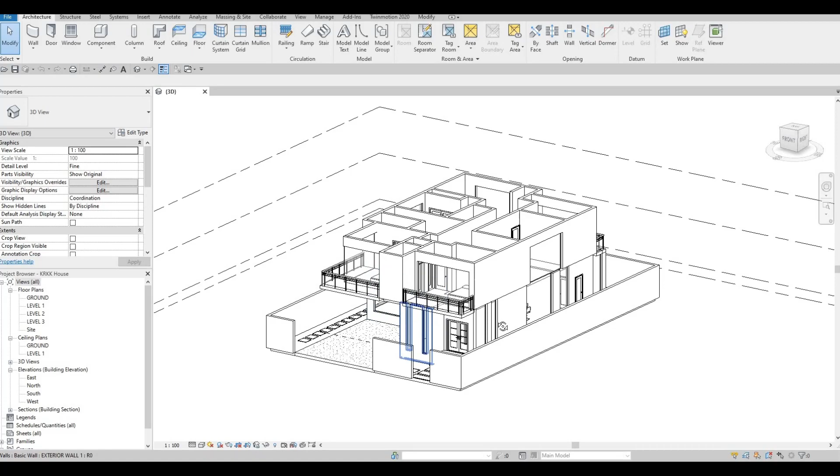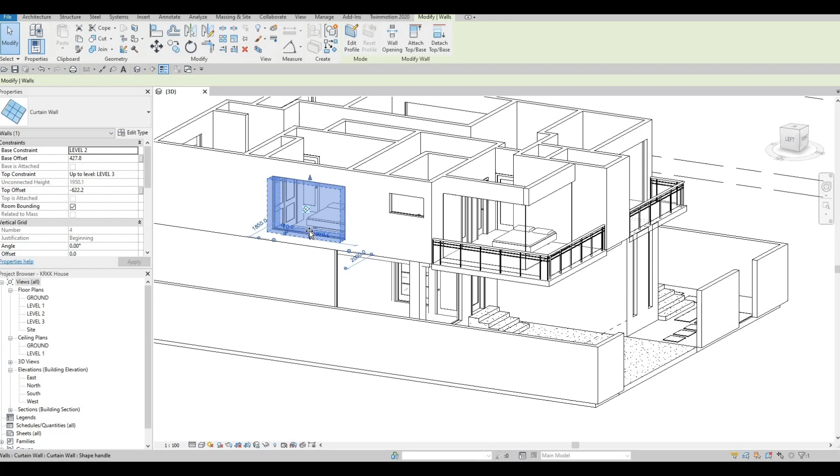So in the previous video, we were able to add in all the windows right here, and now we're gonna continue working on this. What I'm gonna do is set the sill height for the window. For this one I'll set it like that, but here I want it all the way down. For this one, it's the washroom, so I'm gonna set it above right here. And then this one, I wanted to pull it up a little bit because we don't have anything right here, only the bed is showing. I'm also gonna fix everything at the bottom.

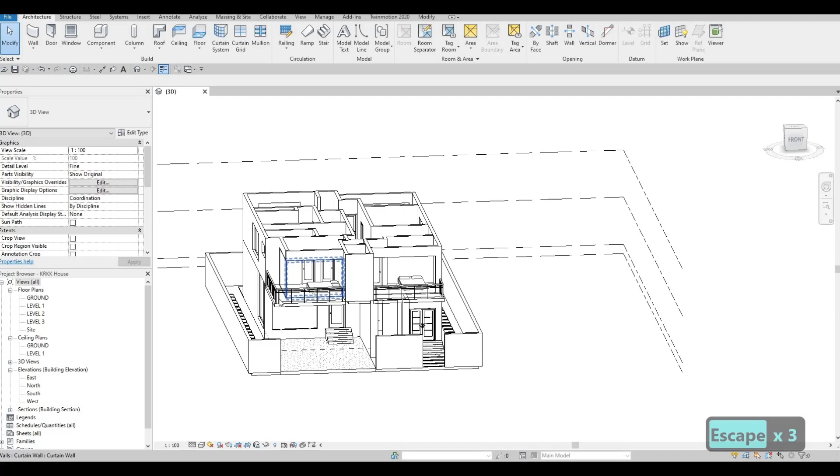So we're probably gonna concentrate here. I'm gonna align right here, and then let's go around here. This is the same height like that. This is where we have our balcony, so I want it all the way down, same as this one. So we're good with this. This one is already set up going all the way up, so we just need to make this one beautiful.

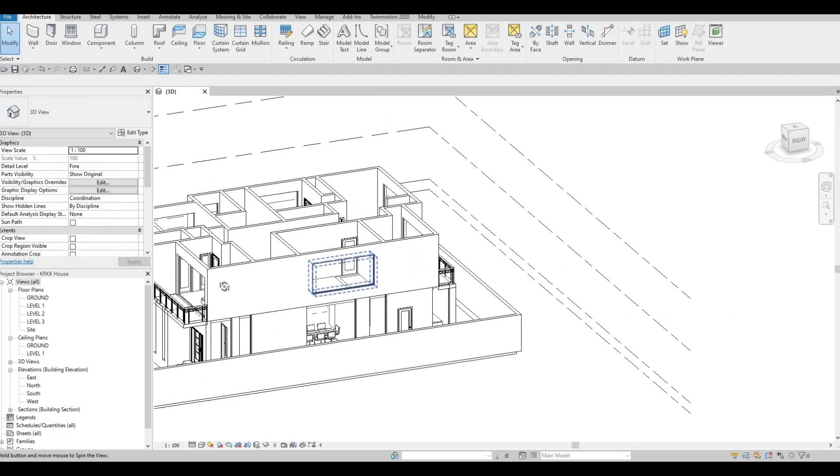I'm going around to double check the ones at the top. Once you're good, let's look at the bottom. So for the bottom, as you can see, we haven't set up the height. Usually the height for the top is all uniform.

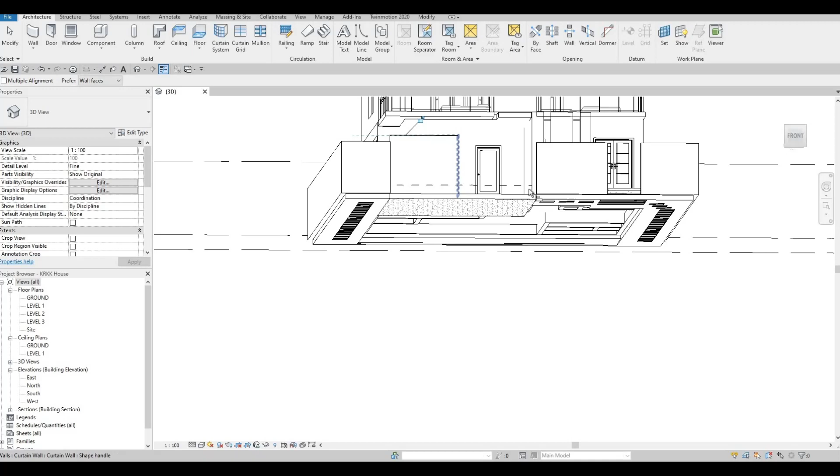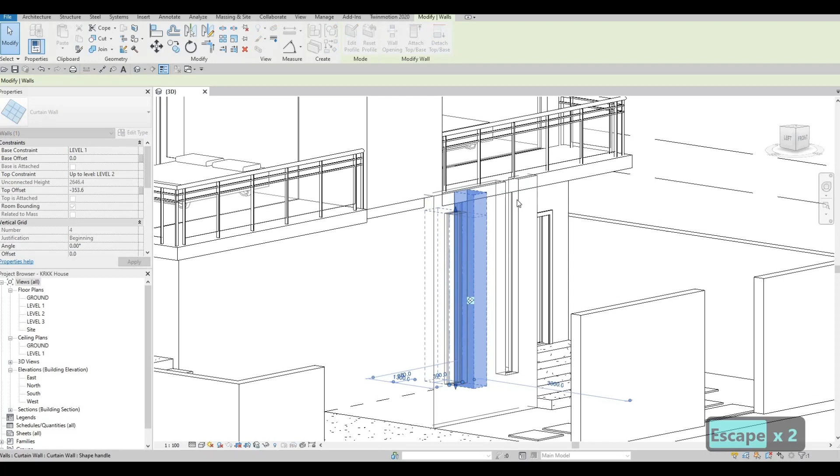So here I'm gonna do this one all the way, so like that, and then here we're going to fix this one as well. What I'm gonna do is pull this one down first because I'm having a hard time getting it. So now I'm just gonna set it to the correct height. There we go.

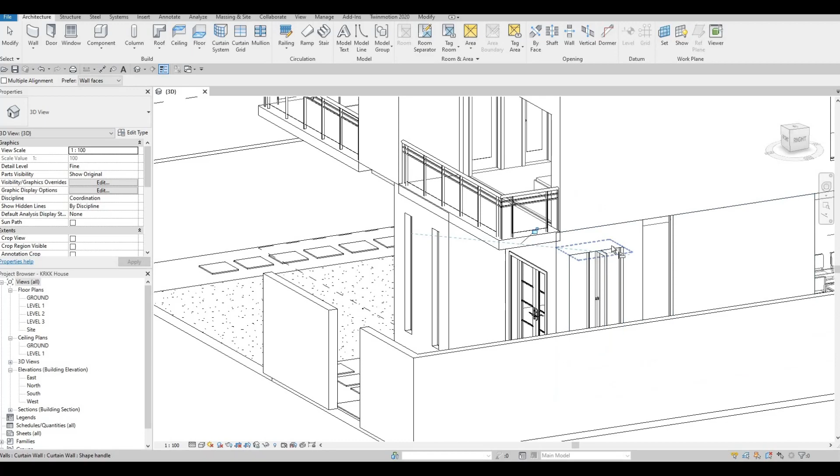This is a washroom right here, so we're going to pull it up later on. This is for the maids and the driver, and then we're going to pull those up as well.

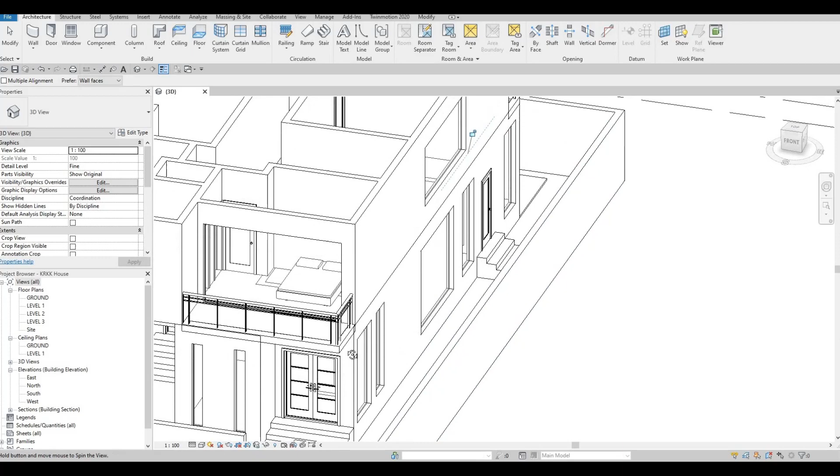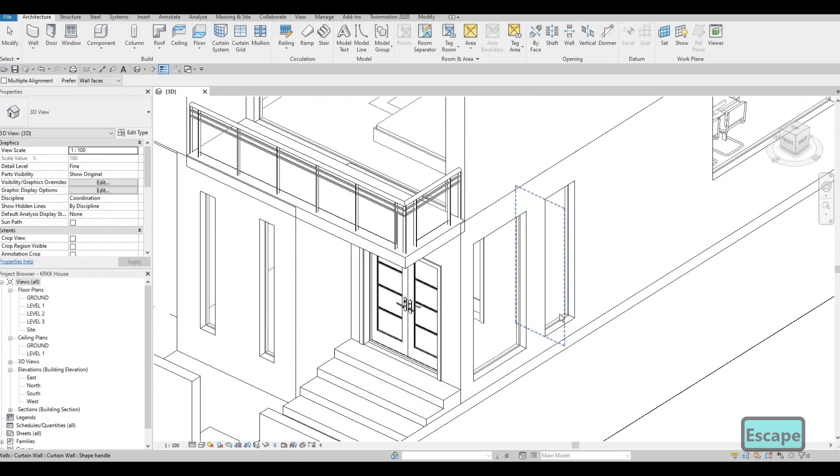So I'm gonna set this one, this height, so just about like that is good enough, and then it will be the same as the rooms for the maids and the driver. And then for this one, this is the one for the washroom, so I'm gonna pull it up a little bit like that, and then here I'm gonna set it up like that, and then we're probably going to just use this height to make everything consistent.

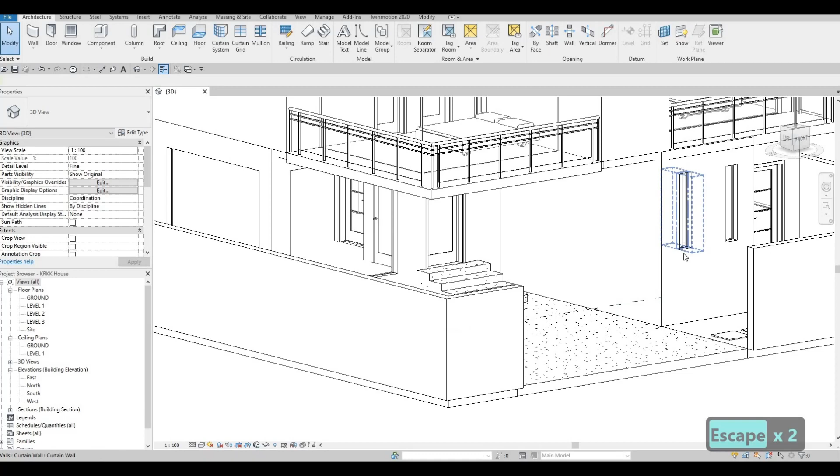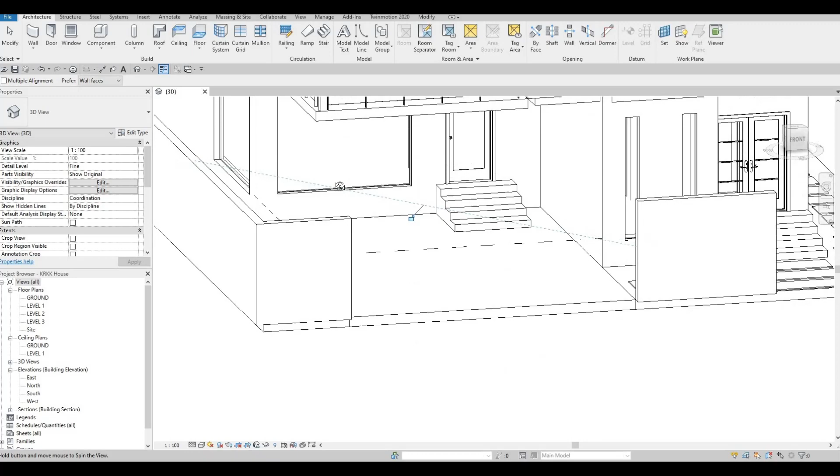But here, no, I want to set up the proper height here, not all the way down, but at least you can see the way it looks. Just want to make sure that it's not actually all the way down, so I'm gonna pull it a little bit up.

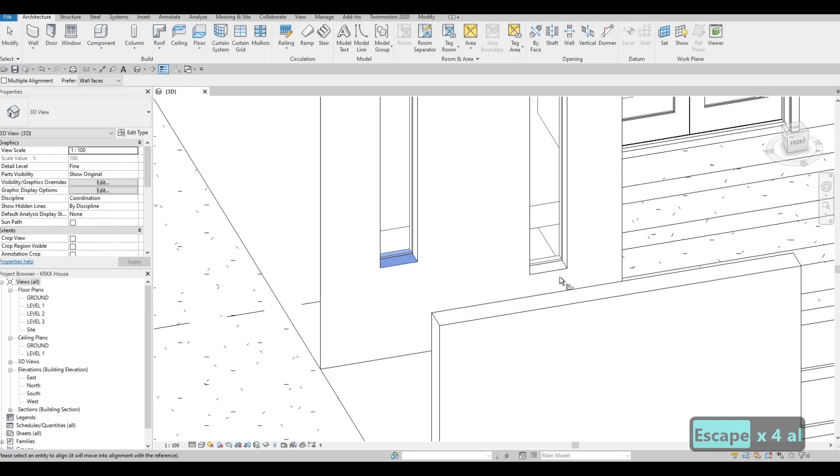And then here I'm gonna pull it up manually because I just want to showcase right here only. And this will be the carport.

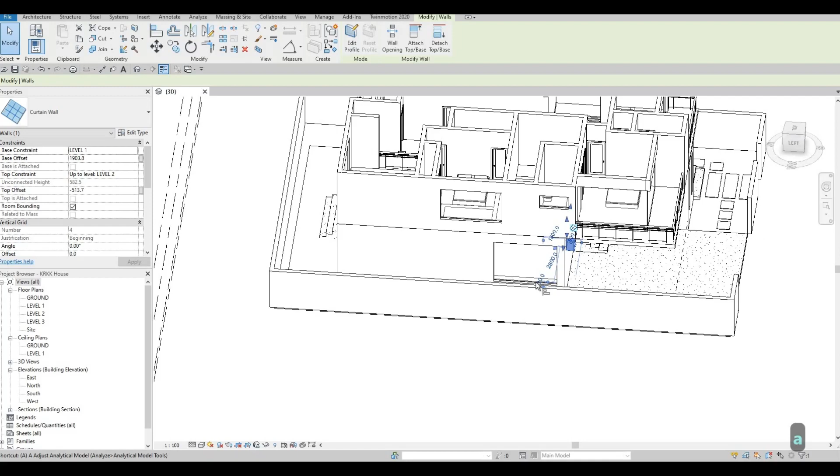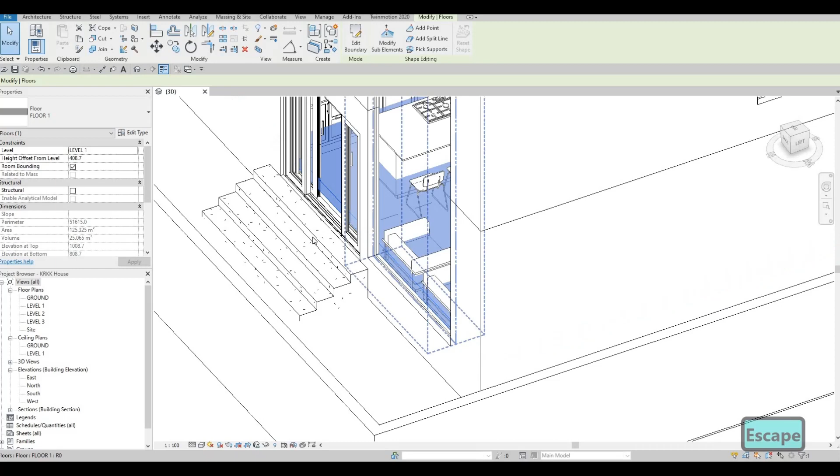And then for the height here, let's set up the same height right here. And then here we need to show it right there. Height offset, there shouldn't be a height offset, so let's put it in 0. That's why I'm noticing there's some irregularities with that one.

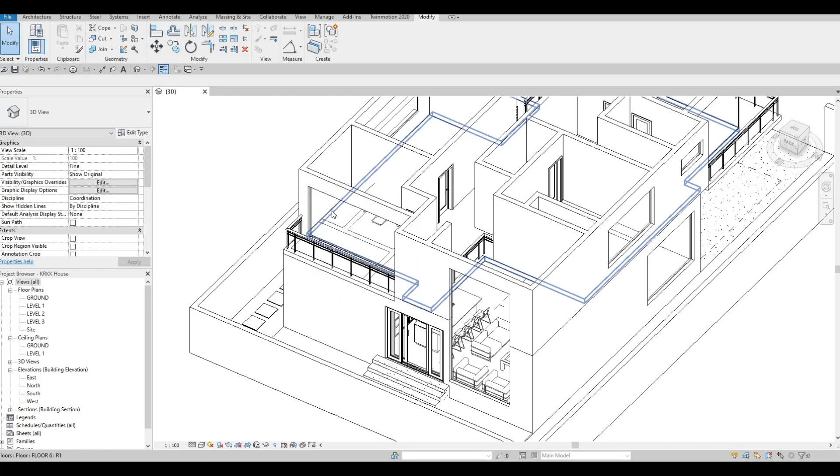Okay, now I'm gonna check the height offset. It should be 0. Okay, that's fine. Also, what I'm going to edit is this. I want it to be close to here. I want everything to be proper.

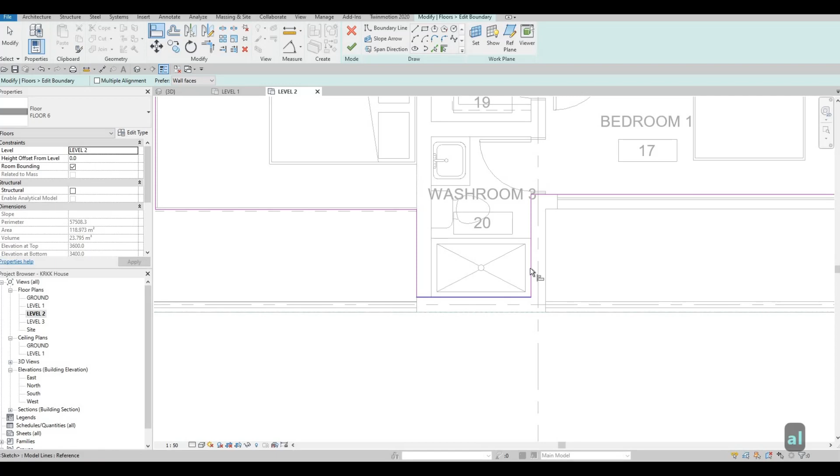Let's go to level 2 so that we could see it. You need to go outside here. You need to go outside here. I think this one is good. And then if we check again, everything is proper.

So now let's add the roof. So we need to go to level 2. The reason we're gonna go to level 2 is because I want to show or to see where we're going to place the roof.

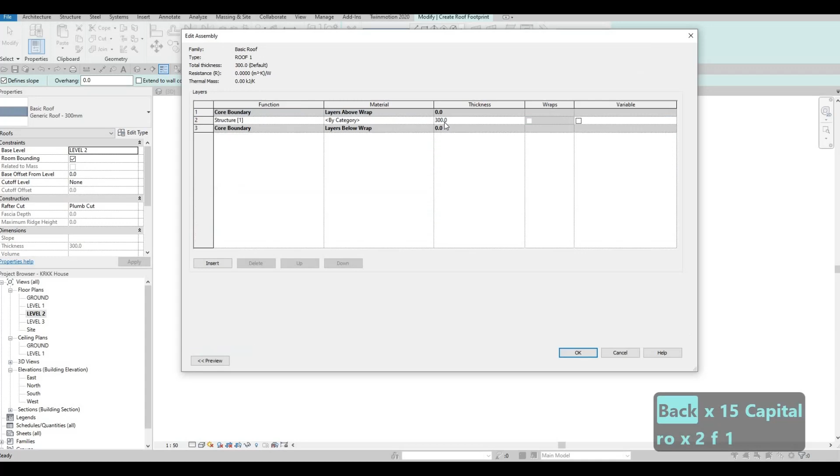But once we select the roof, we're going to change it to the proper level. So you need to go to architecture, click on roof. You can use this, edit type, duplicate, roof number 1. Press OK, edit, 200. And then here, let's put in the proper material, shingles. Use this, press OK, and then OK.

Once you're good, I want you to click on rectangle. Make sure this one is checked, because this is not a flat roof. And then this one should be 2000, so 2 meters offset or 2000 millimeter offset.

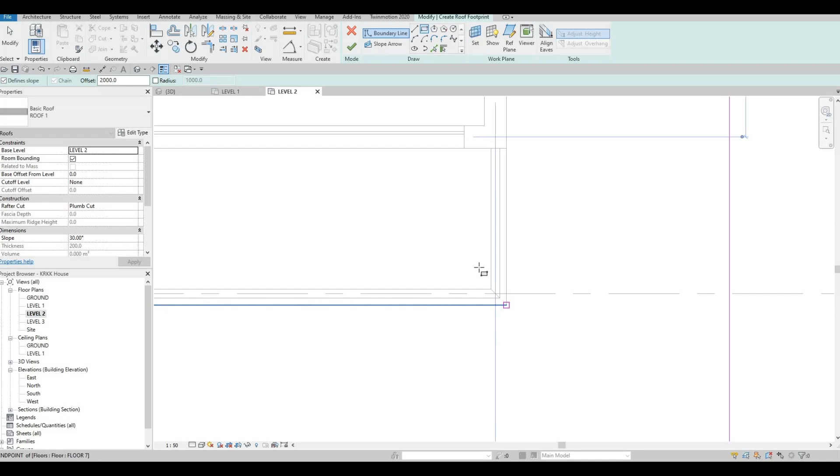I want you to click on each end, so the corner right here and the corner right here. And then because we've added offset, it will offset 2000 exactly, and it will be on the outside, not the inside offset. If your offset shows from the inside, you just need to click on spacebar to flip it around. And then now, click on finish.

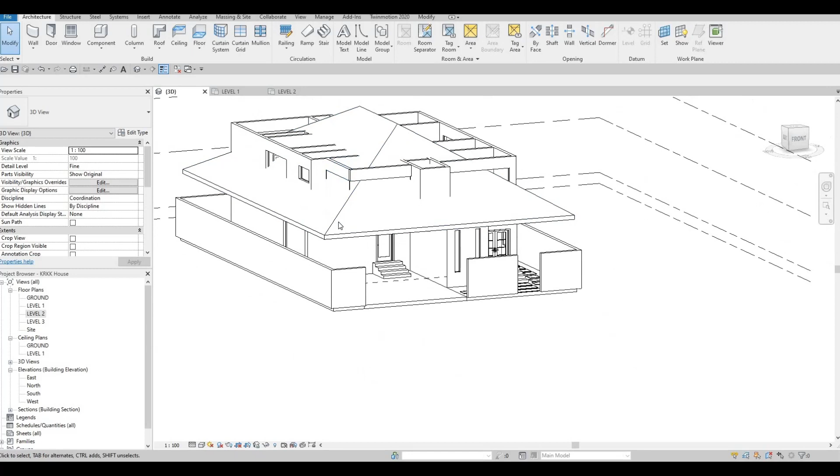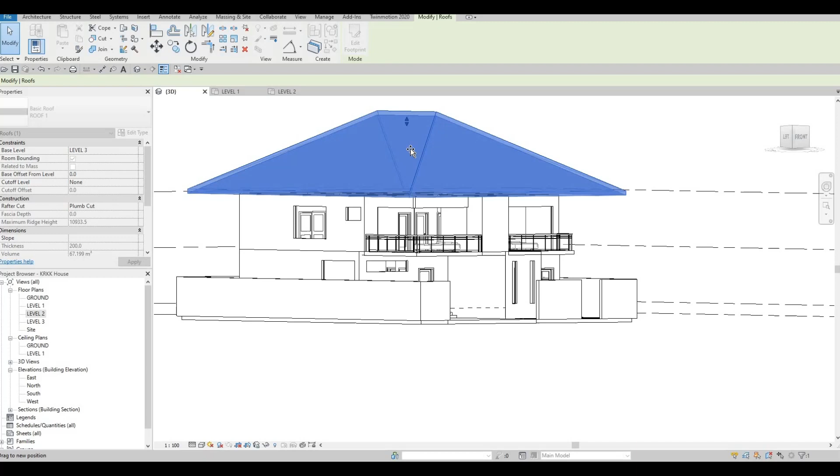I want to go to here, and then now we could select here, base level. Let's change that to level 3 and it will go up. So that's how easy it is to change the level of that. And then after that, let's go click here. We can manually drop it to the desired height that we want.

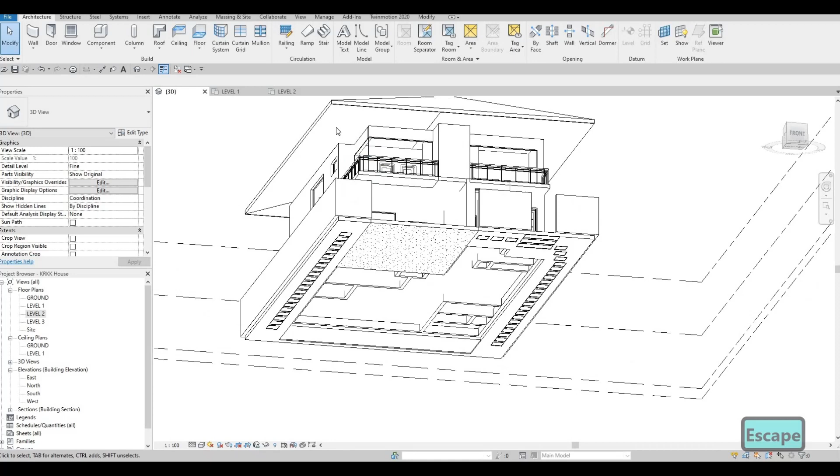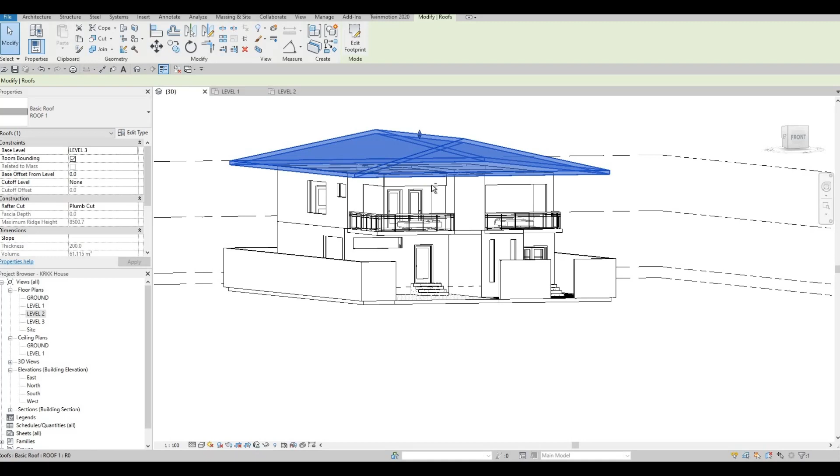This is a design portion, so we could just manually change it to the design that we want to. Most of the time it depends on the location, if there's snow, it needs to be on a proper ratio, height to slant ratio, those kind of stuff. So depending on where you live, there's a proper ratio to use for the roof. For now, we're just doing this as a design, so let's just leave it like that.

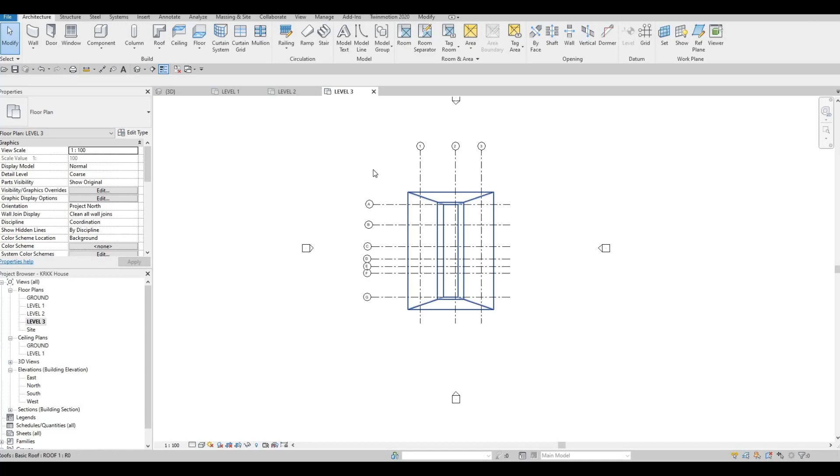After that, what we could do is now go back to level 2, or we could go to level 3 if we want to, but the layout of what we're doing is not showing here, so this is fine. So here there's a drop down under roof, and we're gonna create a soffit. Click that, edit, duplicate.

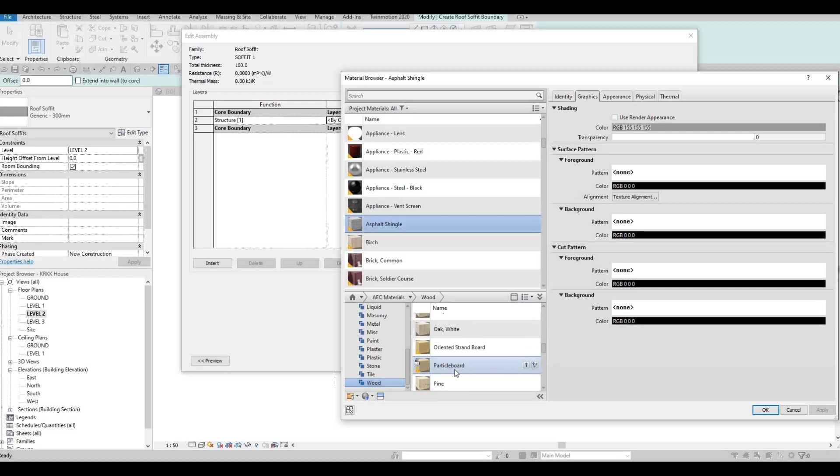You could put this one as soffit 1, and then press OK. Edit. You can change the thickness to the desired 200. I want to maintain this the same, or we can do 100 - it doesn't matter. What I want here is a wood finish. I want my soffit to have a wood finish, so I'm gonna choose something right here, and then press apply and then OK, and then OK.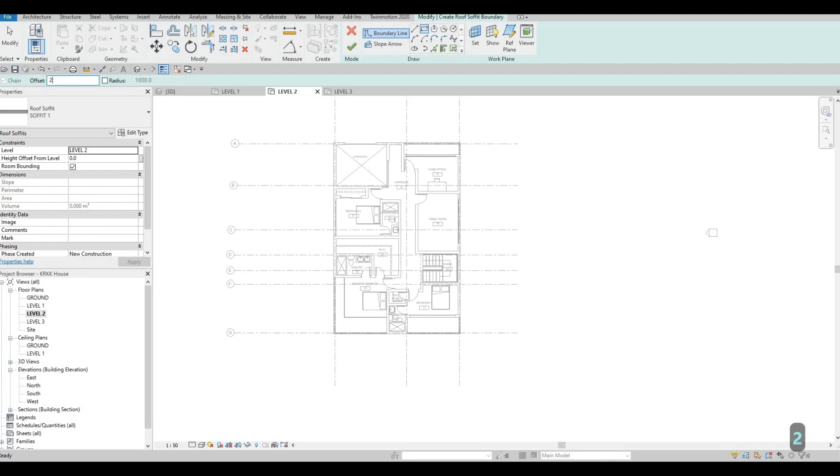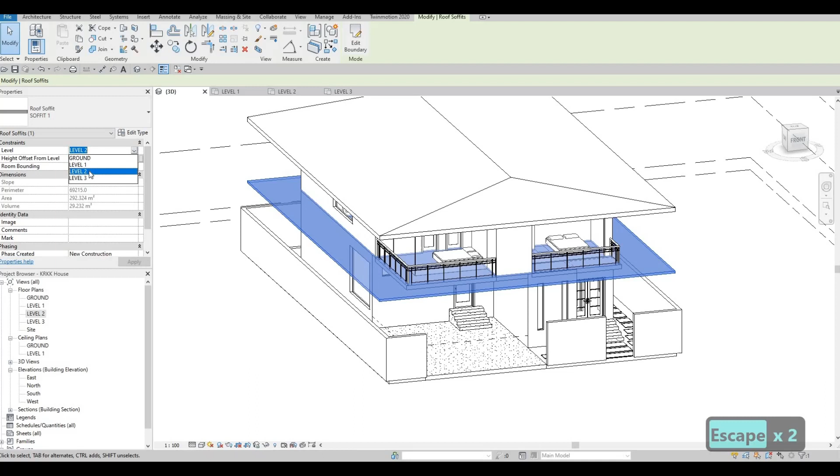After that, rectangle again, and then here we need to go offset. Click the same thing as the roof, and then click on finish, and let's see how it looks. We need, once we go here, to flip it to the right level, or right base, which is level 2. Click apply, and it will look like that.

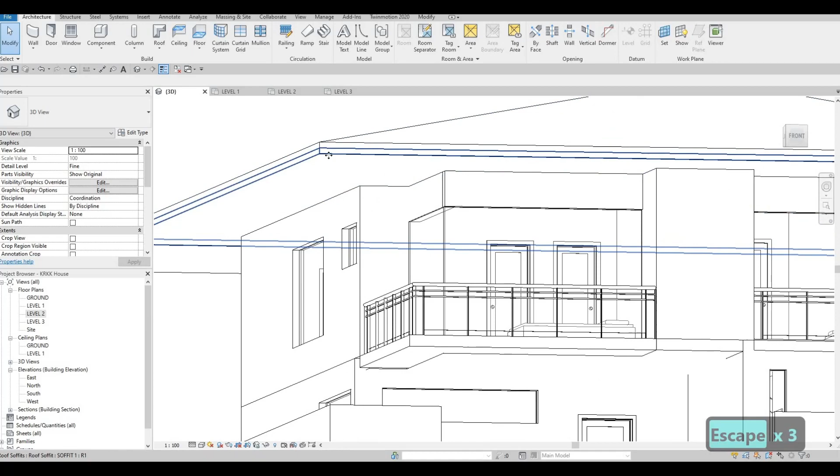Now what you just need to do is, we just need to add in some design for our gutter, or we're going to use a sweep command for our model in place. Either way, the only thing is for the gutter, you will need to create a profile, and that takes a while. So for me, I just like doing model in place in terms of gutter instead. Here I created the soffit, so we could basically add a model in place around this.

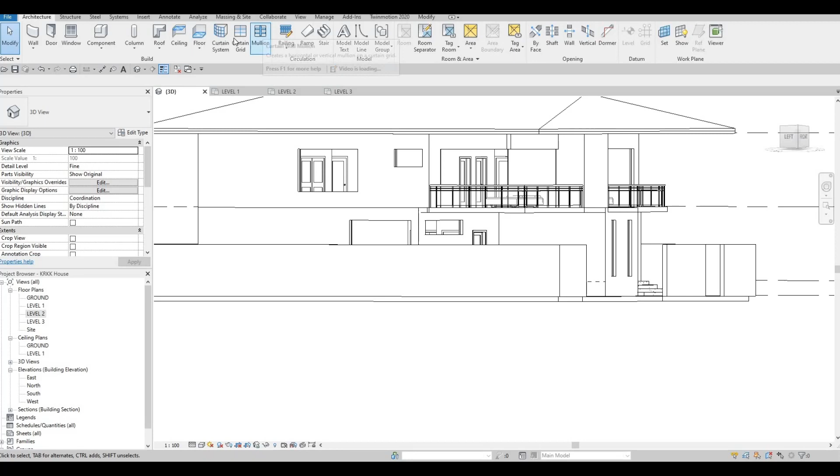But before we do that, let's finish up our windows first. I just like to add the roof so that everything looks proper now. But now I want to add curtain grids to our windows. So here what I'm gonna do is, I'm going to have at least a 500 at the top. I'm gonna do that here as well, and I'm going to divide it afterwards.

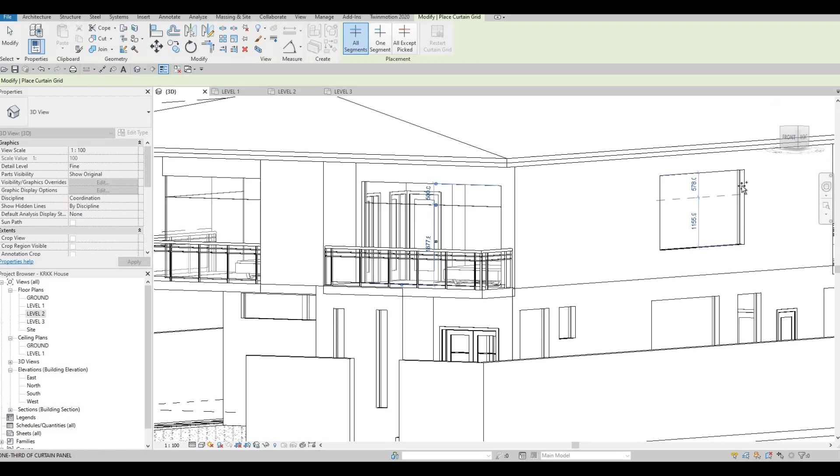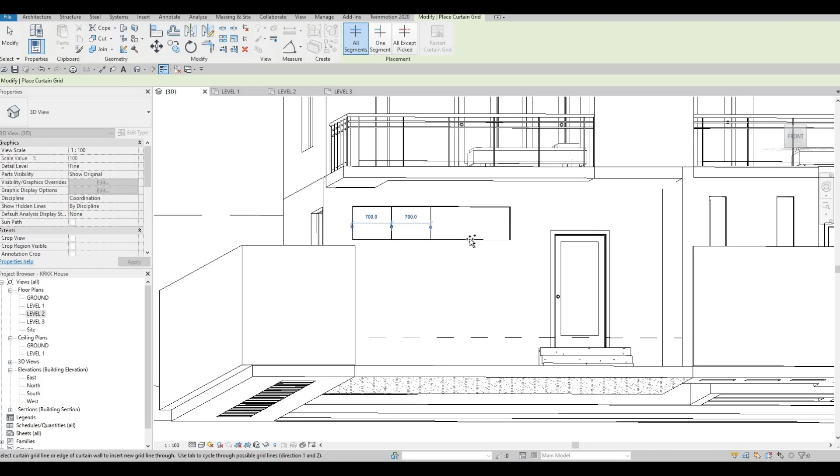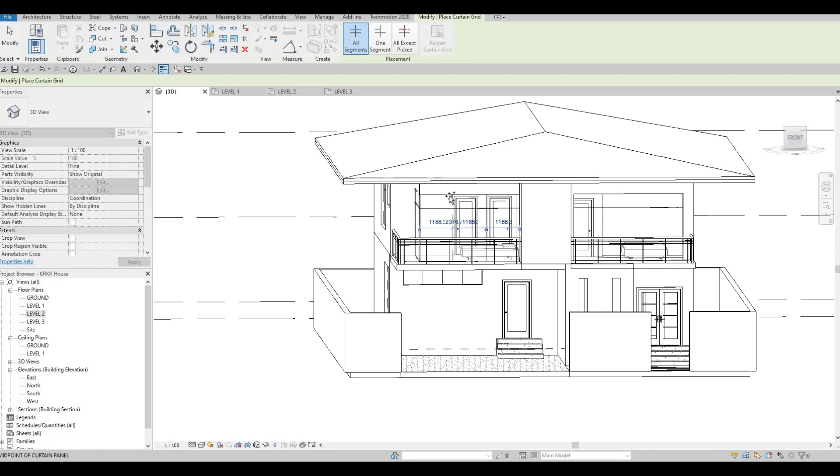So 500 at the top, we can add it here. Most of the time I'm gonna do this on those balcony windows, and then here I'm just gonna leave it like that, but here I'm going to divide it like this. Okay, and now let's divide this by 3 here. And to the point that we're going to divide the same thing.

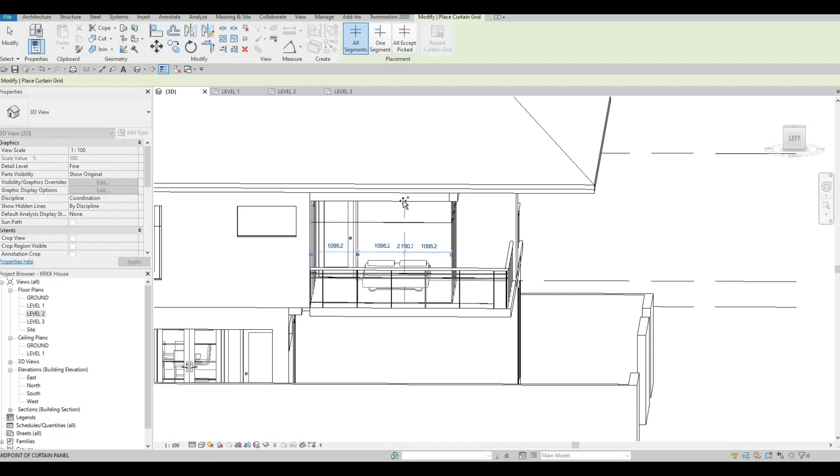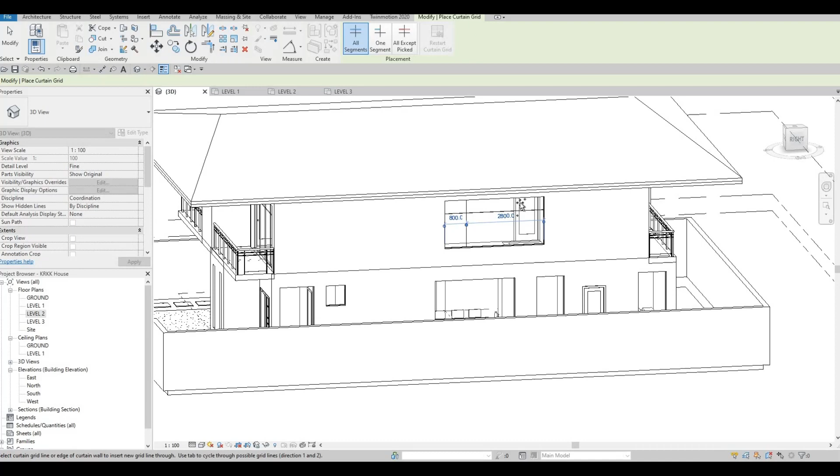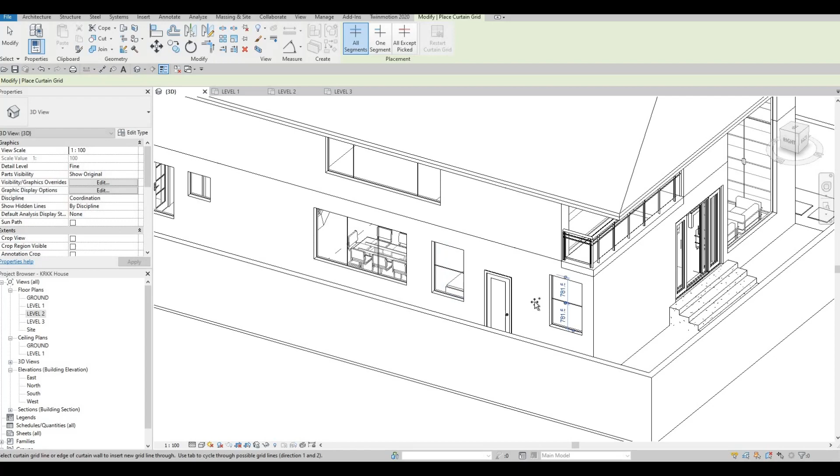So 3 as well to make it proper. I'm going to put probably 800 on each end. There we go, this one is just straight up 3. And then this one probably in the middle. This one middle as well, and then this one middle.

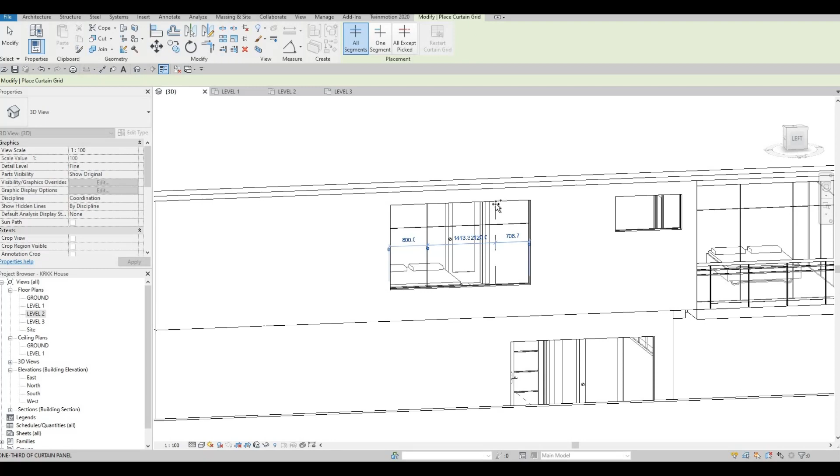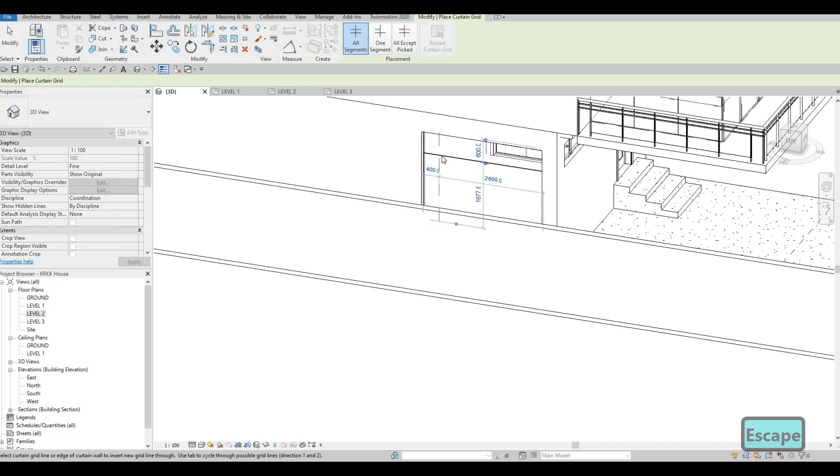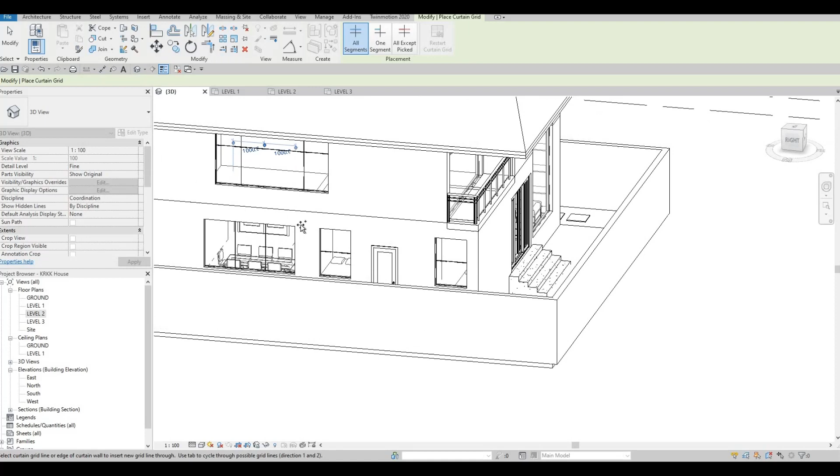So I'm just making it simple for others. This one 800. Curtain grid here, middle, and then here 600 as well from the top. And then 3. And then let's just add this. I'm just double checking all. So this one is the only one, and then this big one as well.

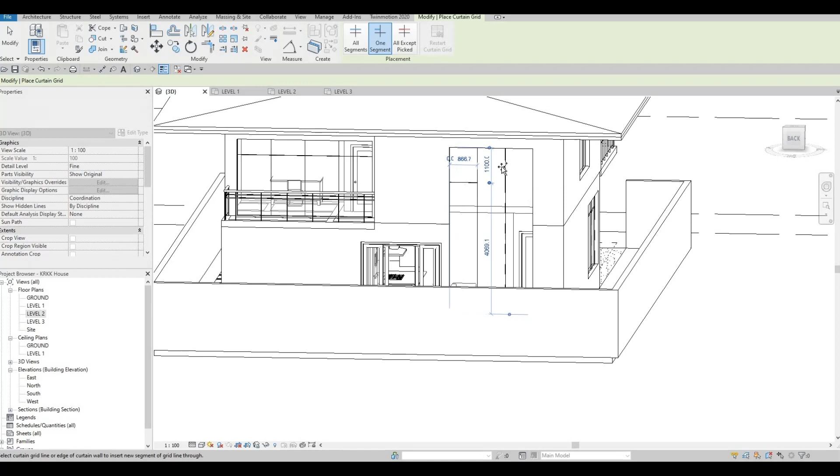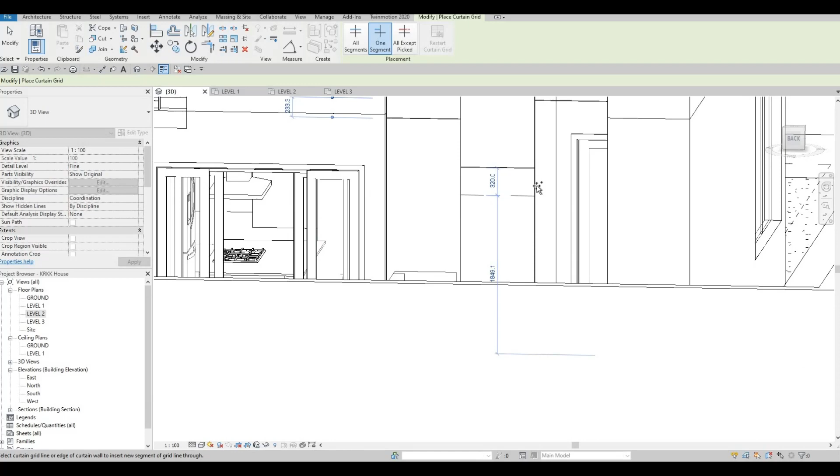So here I can divide this by 4. There we go. And then here I'm going to divide this probably by 3. And then let's just add a single segment and then randomly add this kind of stuff. There we go, I think that's good enough.

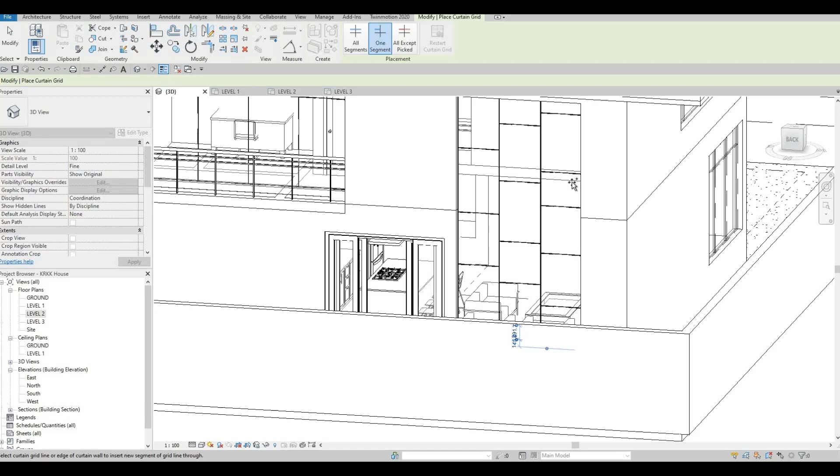And then it's simply by adding mullions, all grid lines. Let's change this one to 50 by 65 rectangular mullions. And then let's quickly add them on all windows like so. Even right here.

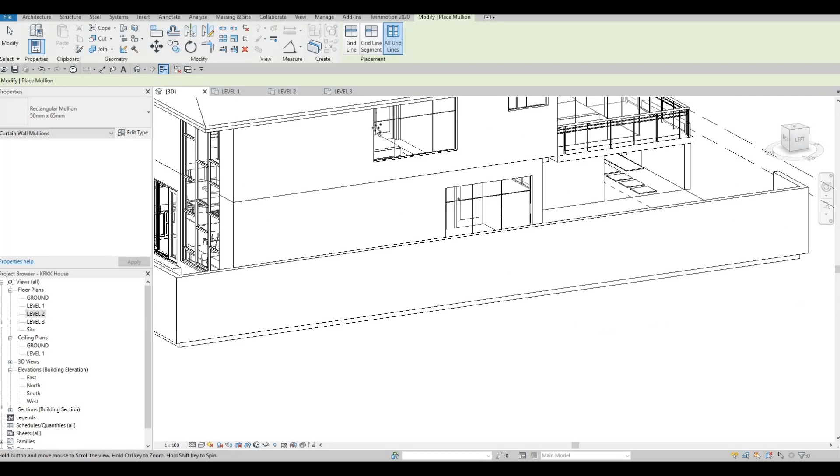And you just want to make sure to scan it, to scan all your models to make sure that you have it all there.

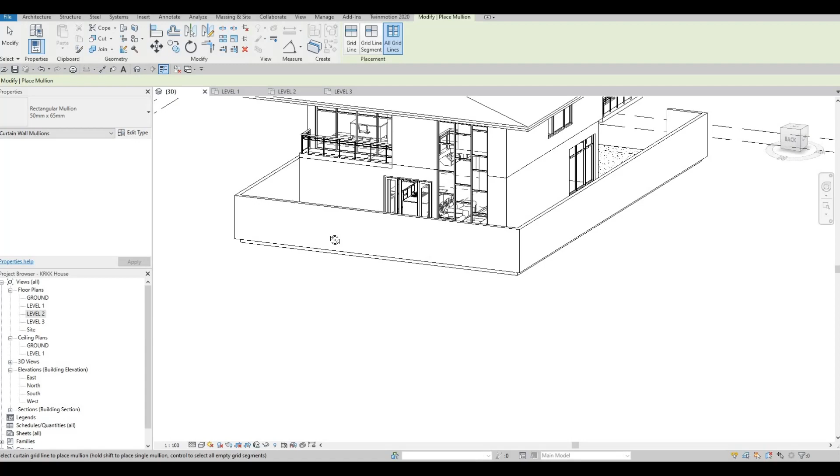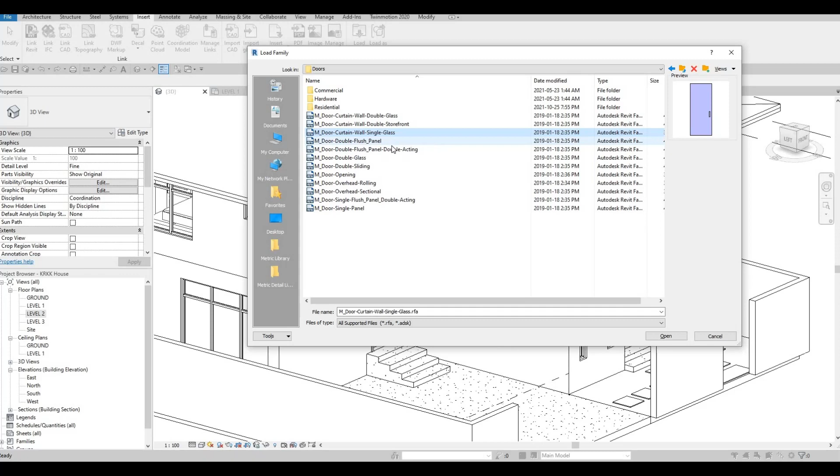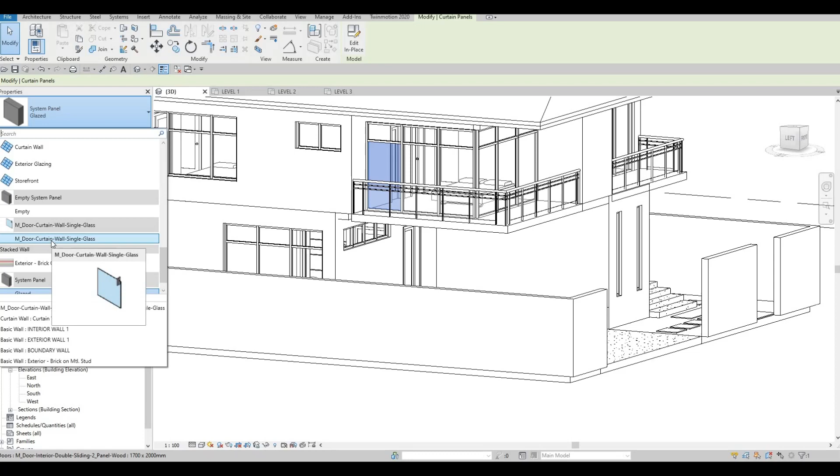And then we need to add doors to our balcony. So what we could do is, let's go to insert, load family, go to doors, and then here single curtain wall, single glass. You will need to insert that, and then what you need to do is click on tab. So once you're able to select the system panel, you will need to go to the drop down and change it to the one you inserted or loaded.

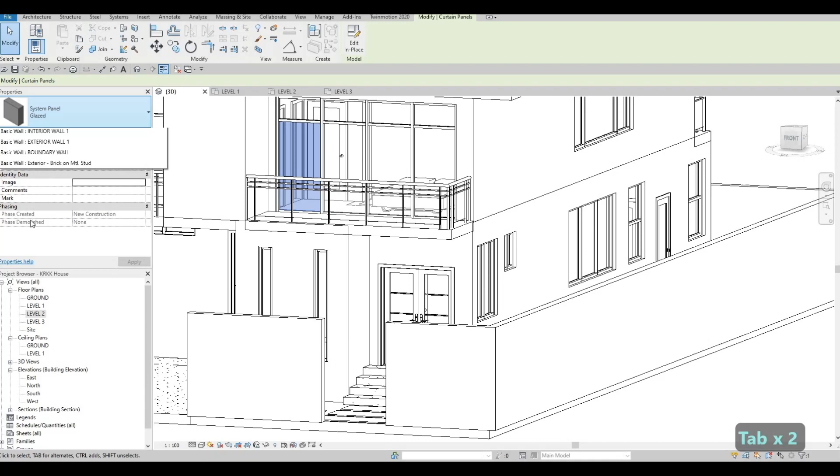Once you do, as you can see, you will be able to load those, but you will need to go to the second floor in order to change the orientation of the swing, how it is hinged or swung. So here we're just adding those, and let's go to second floor in order for us to change orientation.

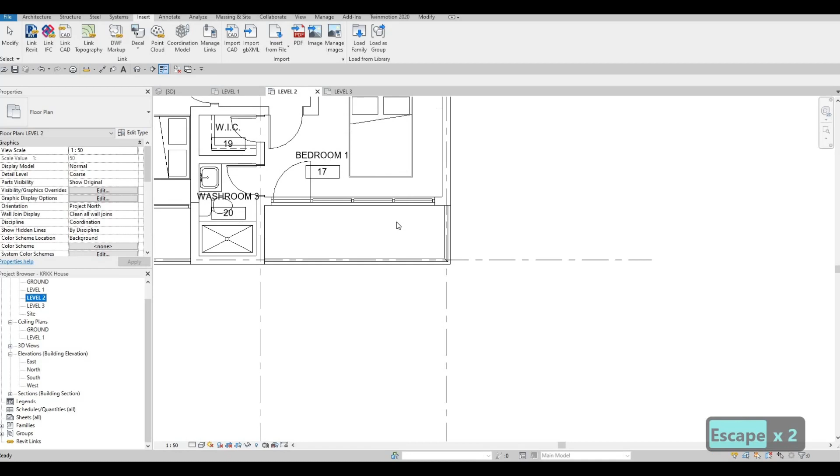And let's add it on the other side. Click on that, and then let's go to level 2, and then here I wanted to swing on the other side, so flip it right here and flip it right there. Same thing here, we could flip it on the other side, so select the door, flip it like so, and that's fine with me.

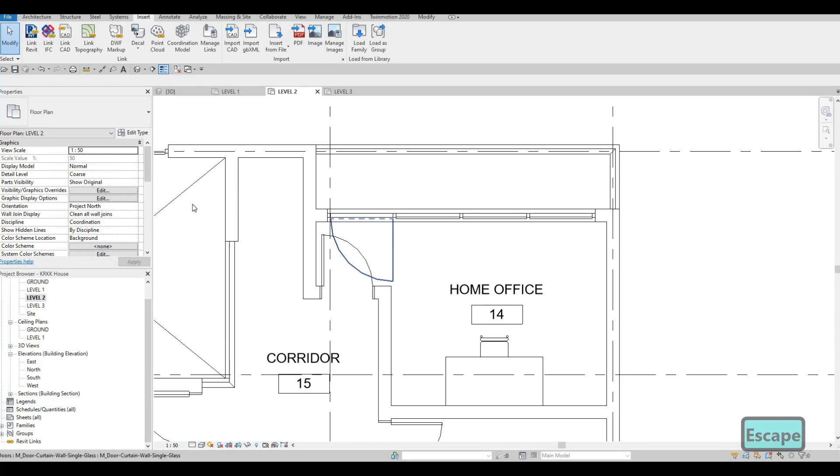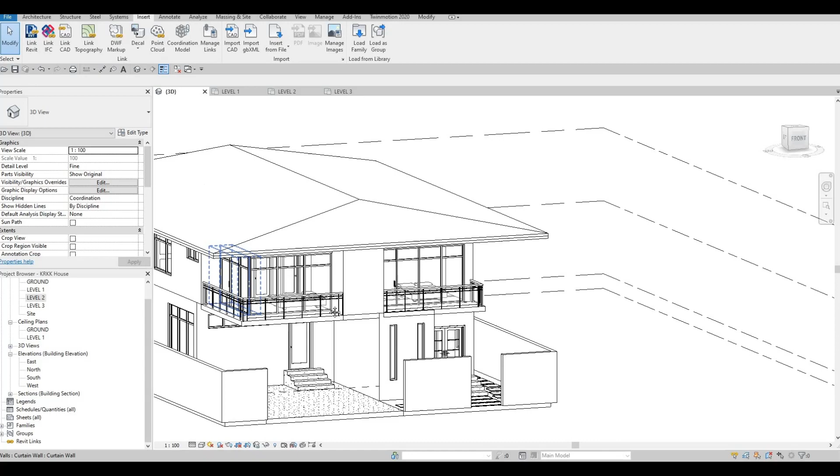And then here I want to flip it and then outside, and then that's fine as well for me to have it like that. So let's just double check that we have everything added. We're going to add one single overhead here, and here let's fix this one as well.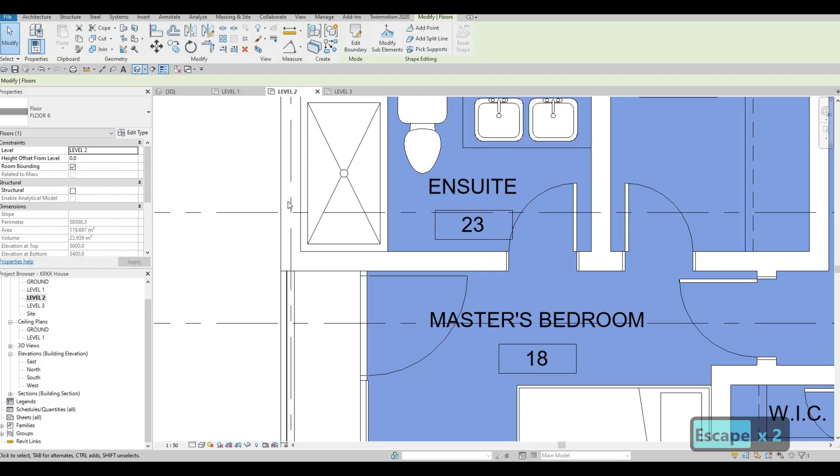Edit boundary, let's go to level 2 to see it properly. And the issue is with this, I believe we need to extend this one like that, extend it right here and there, and then let's just look at it and see if that is correct. So just a little bit more at the there we go, and then just double check somewhere right here it needs to go.

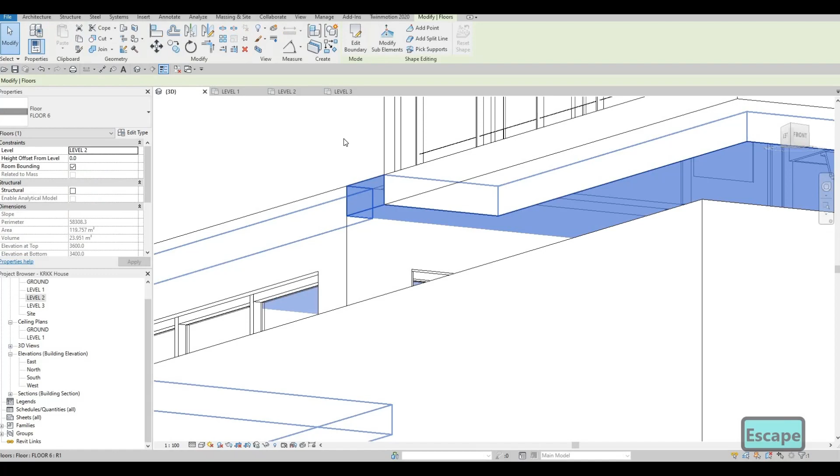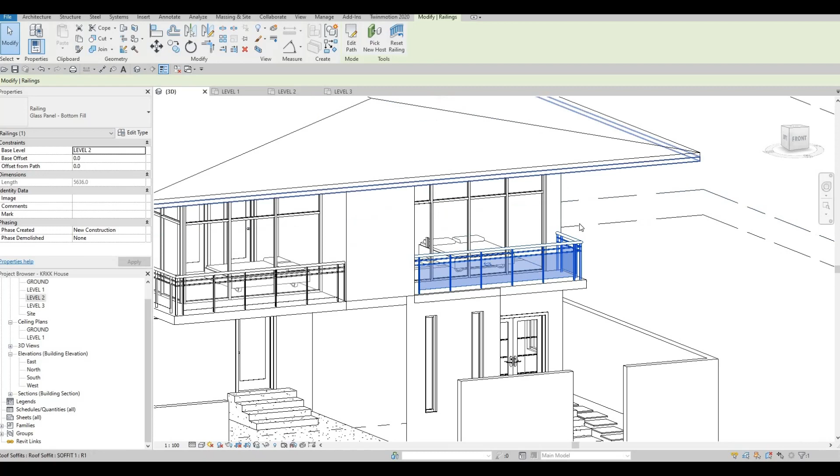So that's fine, because we will add a proper ceiling, the same soffit ceiling right here for the outside, and then right here as well to have a proper one, and then we will need to add - we're probably going to change this instead of going L. I want to add somewhere here, I'm going to extend this. Extending is just so that we could create a design for this one.

So let's stop here for now and continue on the next video.